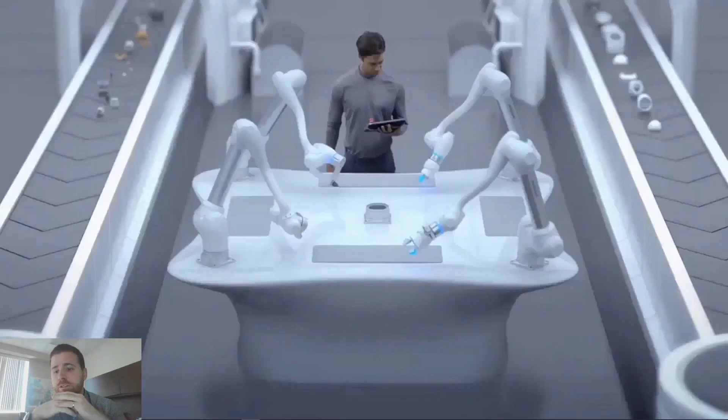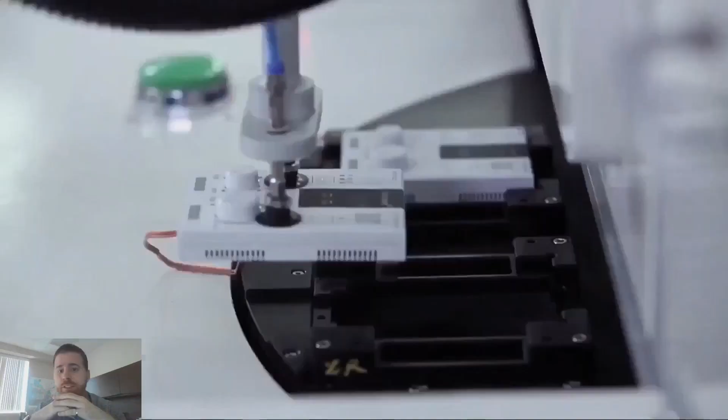Doosan Robotic has been created a few years ago and is rapidly rising as one of the top cobot makers in the world. They just recently passed all the certification needed to enter the market of North America and Europe as well. It's one of the reasons that you're now seeing them.

The first series that Doosan offers is the M series that comes in four different robots. To go more in detail, the first robot is the M0609. You will see that the first letter of the name of the robot represents its series, and then the next two digits represent the payload. So 06 for 6 kilogram payload, then the 09 represents the reach of the robot, a 0.9 meter reach.

And then there's the M0617 that got a huge 1.7 meter reach, and then there's the M1013 with 10 kilogram payload and 1.3 meter reach, and finally the M1509 with 15 kilogram payload.

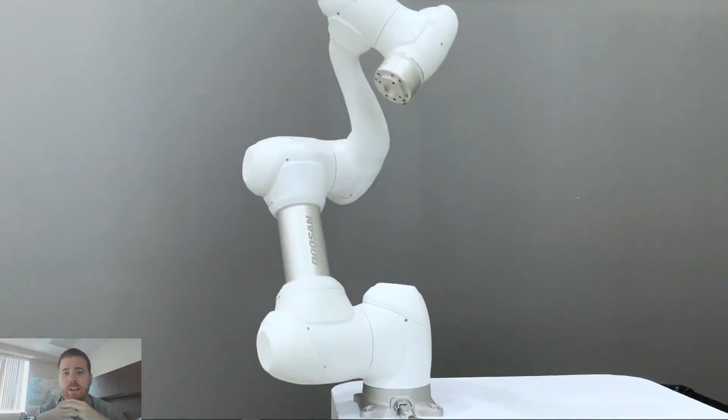One of the huge advantages of the Doosan M series is that they got torque sensors on every axis. Let me show you very quickly. The fact that they got a torque sensor on every axis means that the M series is the most sensitive cobot on the market. It allows it to do some very advanced force and compliance controls.

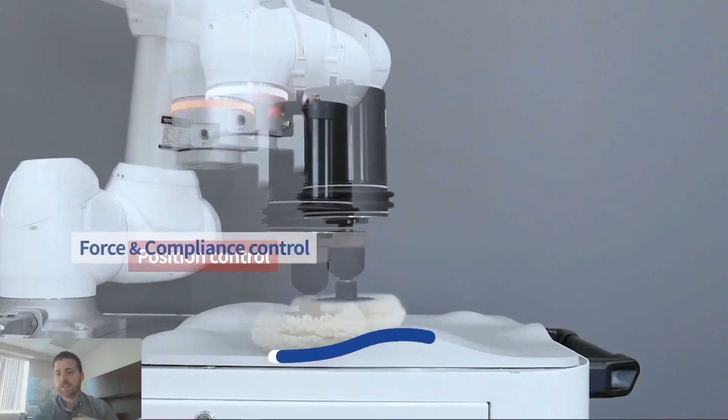As you can see on the screen, you can apply a constant force and apply a compliance mode that will make the robot adjust itself depending on how much feedback it got on the surface. So on the contrary of a robot that will try to follow the line, the robot is able to move around very, very efficiently.

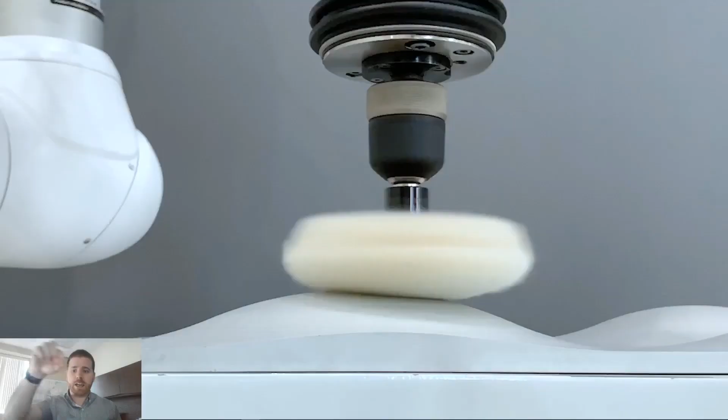Then when you order our M series, it will come with the controllers and the teach pendant as well. And there are several options that you can choose from, like you can choose the colors of the robot if you want it in white or in navy. You can also opt for a DC controller instead of the standard one that will allow you to put the robot on a mobile robot, like our MiR robot, for instance. And there's a stainless steel model if you want it.

And there's also the cockpit. This is an option that will allow you to take the robot and move it around freely. I will show you a demo a little later to see how it works.

Then the second series is the brand new A series. It comes in four different models again. And one of the main advantages of the A series is that the robot is both faster, more accurate, and it's also less expensive than the M series. We are pretty confident that the A series offers the biggest ROI on the cobot market right now.

The A series comes with its controllers, the platform and e-stop buttons, and there are several options. Like the M series, you can choose between navy and white colors. The DC controller is to be released, but you still have the option to add a cockpit. And then there's the smart pendant and teach pendant that is available.

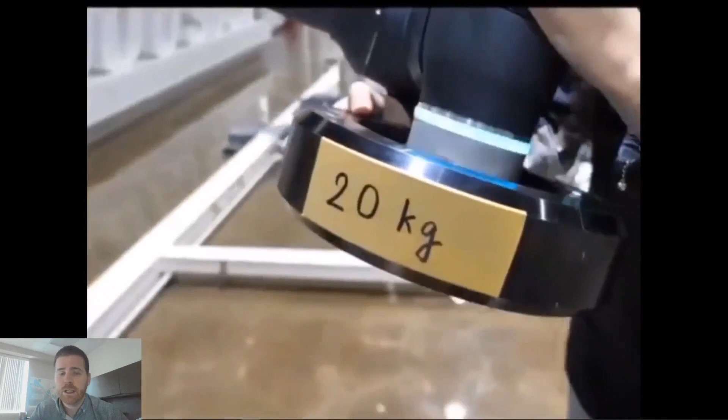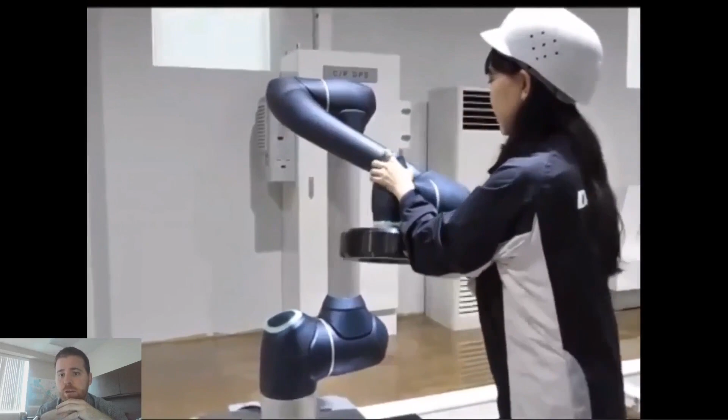Then finally, Doosan have just announced that at the end of this summer, the new H series will be available. The H series is for heavy, and will offer two robots, one that has a 20 kilogram payload, as you can see on the screen right now, with 1.7 reach, and then there's the H2515 with 25 kilogram payload and 1.5 meter reach.

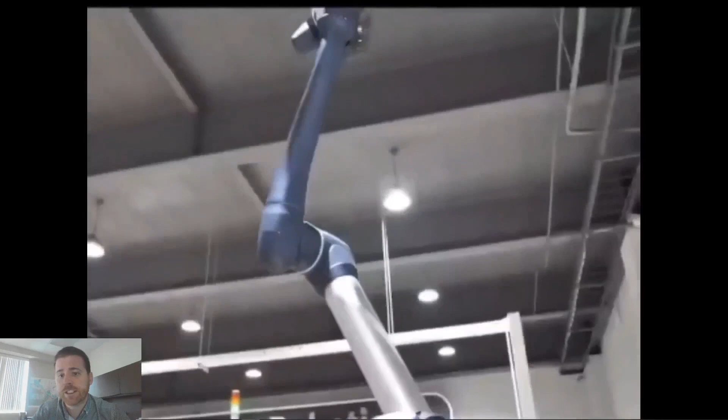Those robots will be available at the end of the summer and will allow Doosan to offer the widest range of cobot on the market with 10 different robots ranging from the very small 0509 to the huge H2515.

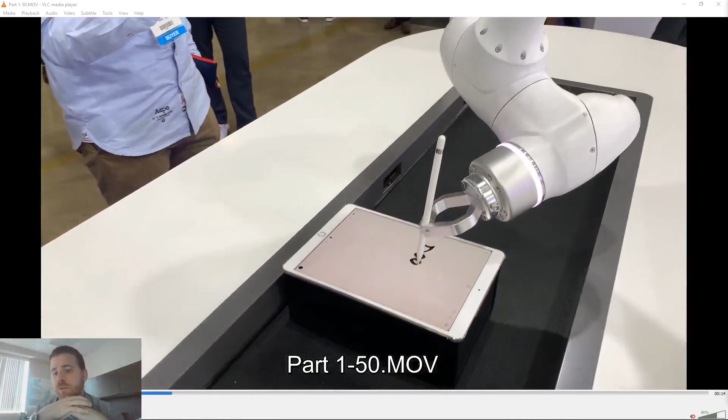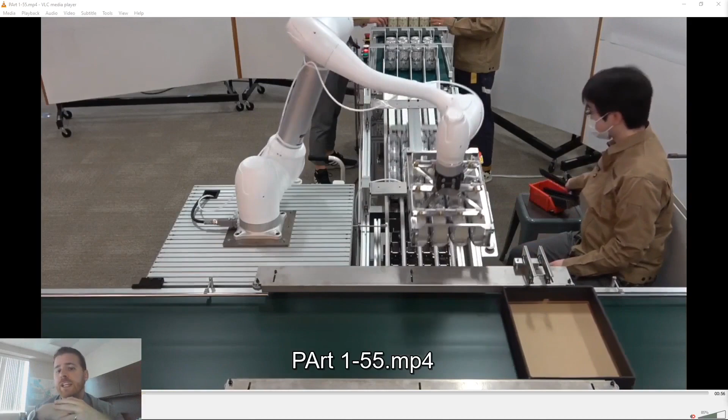Doosan offers many different features that are usually only available on the industrial robot. One of those is conveyor tracking, if you want to follow objects on the conveyor. I'll just show you a more concrete example with SIA Group that have selected Doosan for their beer packaging solutions. So, as you can see, the Doosan will go and pick several bottles at the same time and place them directly on a moving box.

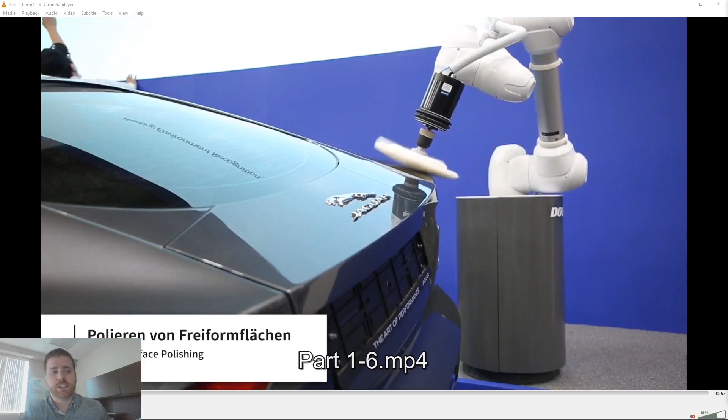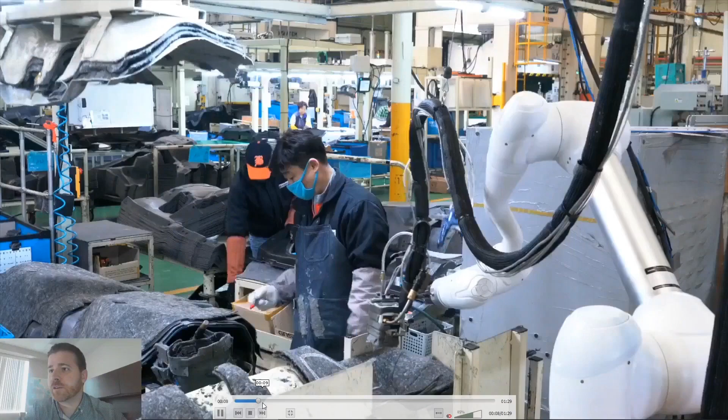There are many different applications that you can have for the robot, as polishing, for instance. There's also gluing or painting if it's something that you find could be of interest, and many consumer applications like fried chicken. So yeah, Doosan is able to do many different kinds of application, and I'm sure you will find it very interesting to work with.

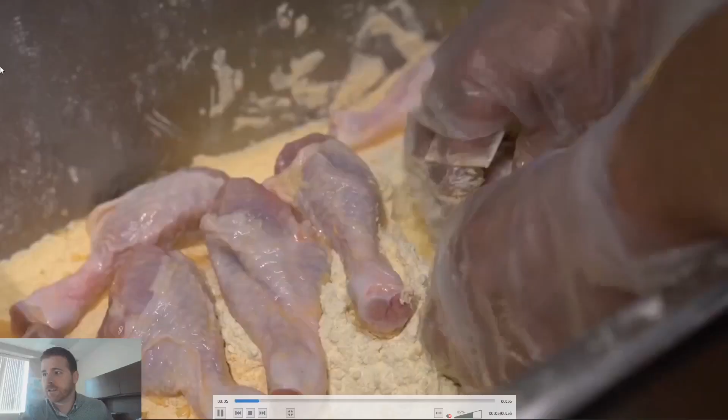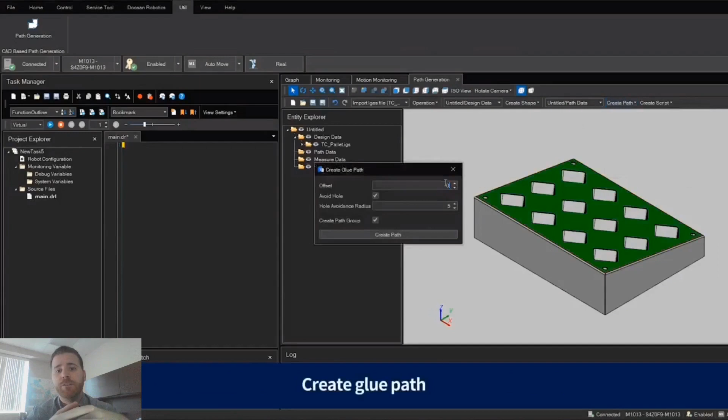Also, Doosan is the only cobot on the market right now that offers a proper simulation environment, as you can see on the screens. The Dart Studio that is available for you will allow you to do some very accurate simulations. You might find it interesting to learn that Doosan is also programmed with Python, one of the most known languages, and the most recommended language by STEM, so science, technology, engineering, and mathematics.

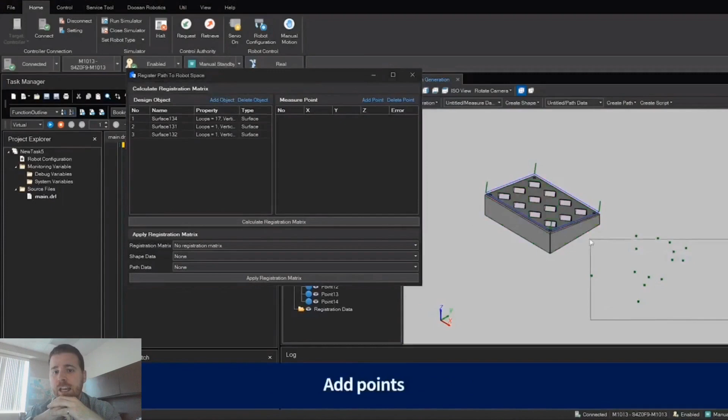There you have an example of Dart Studio where you will just take the 3D CAD model of a piece. The person has just taught a point cloud and will apply a base match to be able to locate the pieces relative to the robot in the simulation environment, and then you can do a program very nicely.